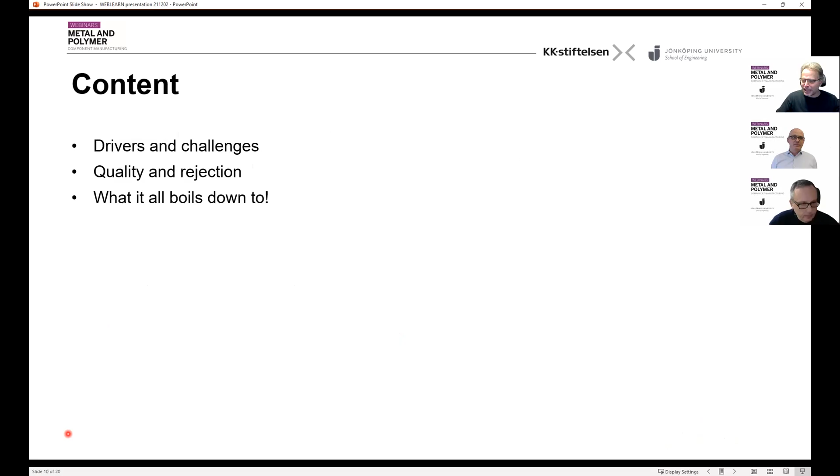My name is Anders Jarfors, and I'm professor at Jönköping University in materials and manufacturing with focus on casting. I will be the warm-up here today, and we'll talk about material quality and sustainability. First, I will cover the drivers and challenges for the aluminum industry, then talk about quality and rejection. And then there is something it all boils down to, which you'll probably figure out before the end. So now, the drivers and challenges.

We have been seeing some fantastic news where things are changing for the aluminum industry. Electrification is driving a lot of change today. We have green electricity, and for the foundry industry that affects resource efficiency in melting and recycling. The aluminum industry has been heavily influenced by the transportation industry, and electrification also drives change in the powertrain redesign with electrical drives. Then we have the telecom industry growing, with huge volumes going to radio filters and heat sinks.

One thing everybody agrees on is that weight reduction is critical, and material change is one way of doing it. Another way is to cast better, with less over-dimensioning, making things thinner and lighter. If you look at the transportation industry, since a lot of electricity is still produced with fossil fuels, it's essential that weight reduction is achieved in vehicles to reach the climate impact targets from the Paris Accord. Especially during the transition, this is important.

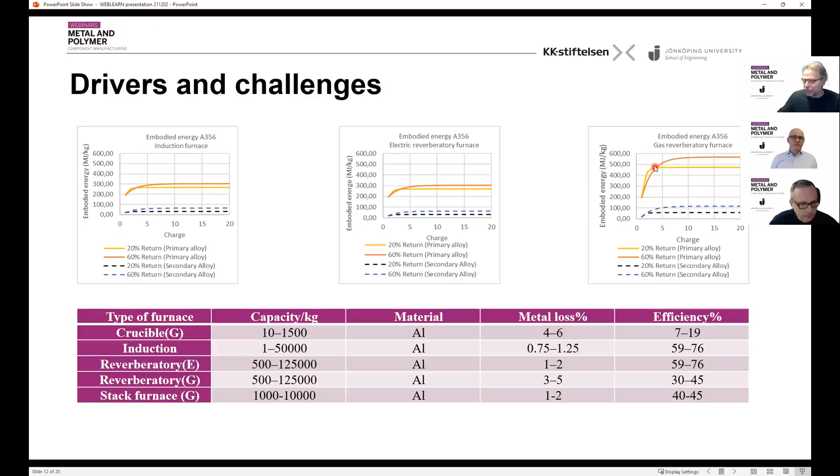Of course, it's better to use recycled material compared to virgin material, but the principle is the same. If you recycle material, depending on how much you recycle and what type of furnace you use, you have different effects. And it's always better with electrical drives than with gas-driven furnaces.

This is something that Murat will cover a little bit more about later. But there is a difficulty in understanding what is a good melt and what is a bad melt. But we know that during the melting process, if you have a lot of material loss, you generate more slag

and there's a higher risk for it to enter the system. Now, these are data that was presented during the S2P conference in Austria, where we talk about semi-solid casting, but that is not the focus here today. The important part is that if you compare the shot weight with the part weight, you have a certain amount that is gating systems, and then you have your rejection rates, and that gives you a certain amount of material that is being returned.

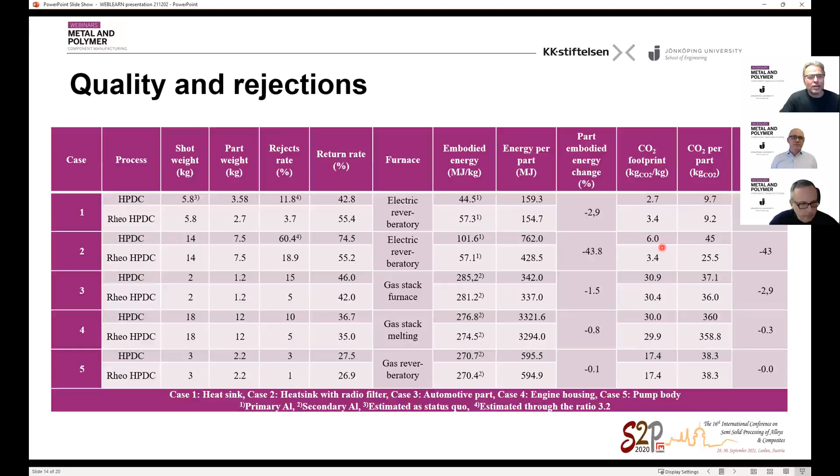But the essence here is still, if you look at the industry, we all know that rejection rates boil down to the last line on your economy. So it goes directly down to rejections, but nobody really cares about the return rate. Of course, it's important not to have a high return rate, but when it comes to the contribution from rejections or gating systems,

the rejections in a foundry are essentially a minority when you have an efficient process. So that means that if you look at the competitiveness of a company, rejects are of course important, but when it comes to the carbon footprint, gating systems are critical. And this is something that has not been properly addressed yet.

And if we think about the gating system, that means you need to have good fluidity in order to be able to reduce those, and that means you need to have control of your melt. And that is essentially what it all boils down to.

To control your melt, that means you need to have high resource efficiency. That means low losses during melting, short melting times, and generating as little as possible material loss and slag that can damage the material further downstream.

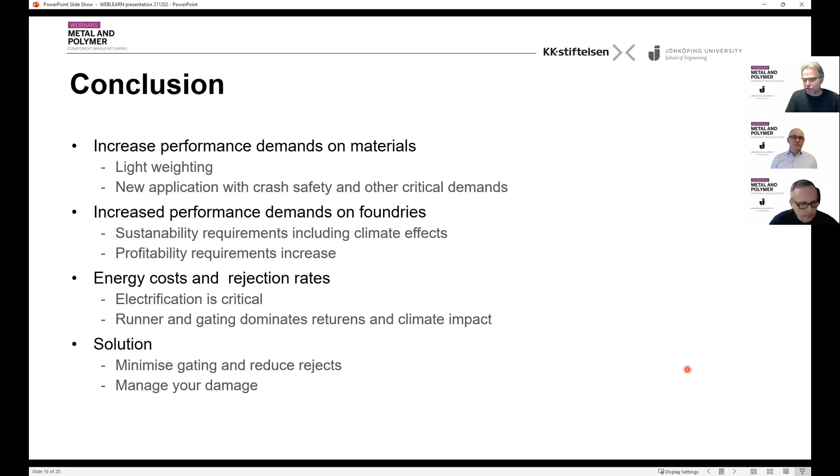Sorry, there is a recording here that comes in. Sorry.

So for some reason this... well, I'm supposed to end here and hand over the presentation to Murat. So it was something that ended with the previous presentation. I'll stop sharing here and hand over to Murat.

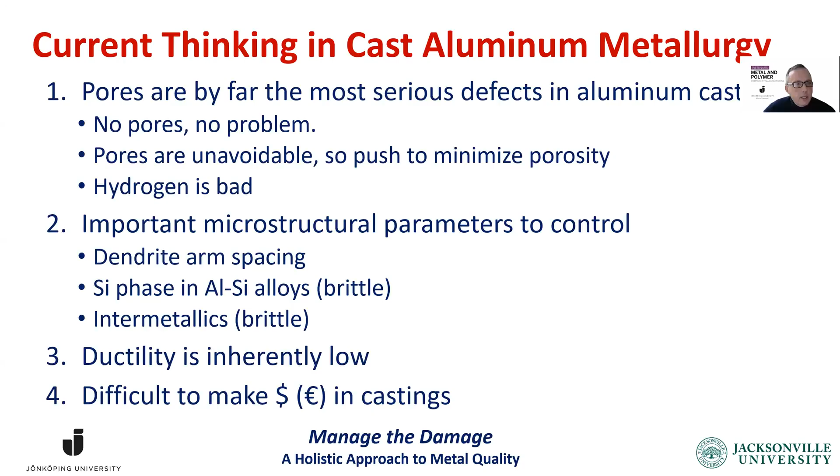There's an alternative thought to this, developed by my good friend and PhD thesis advisor, Professor John Campbell from University of Birmingham, who tells us there are 10 rules to have a good casting. I'm going to cover three of these today, starting with good metal, no surface turbulence, and no entrained bubbles.

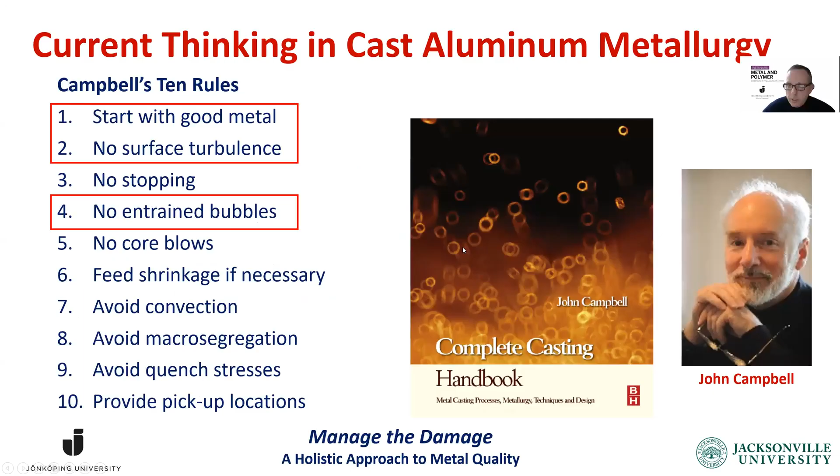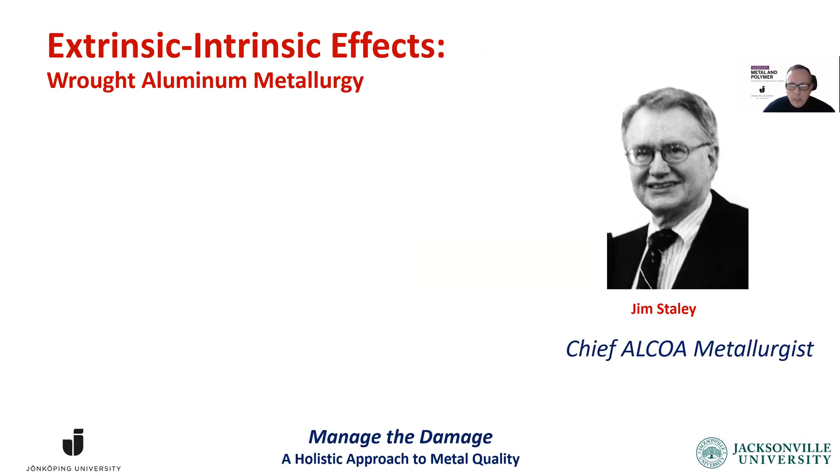I've also had the absolute privilege to work with one of the leaders in this field, Dr. Jim Staley, who was chief metallurgist at Alcoa for a number of years. He taught me that most of the things we see in aluminum are extrinsic—meaning they're not supposed to be there, but they are there because something went wrong. But there is also intrinsic. So what's intrinsic, what's extrinsic? He said hydrogen is extrinsic, pores are extrinsic, inclusions such as oxides are extrinsic. So my thinking was heavily influenced by his expertise and his advice.

All right, what is the damage and where does it come from? It comes from entrainment. And what is entrainment?

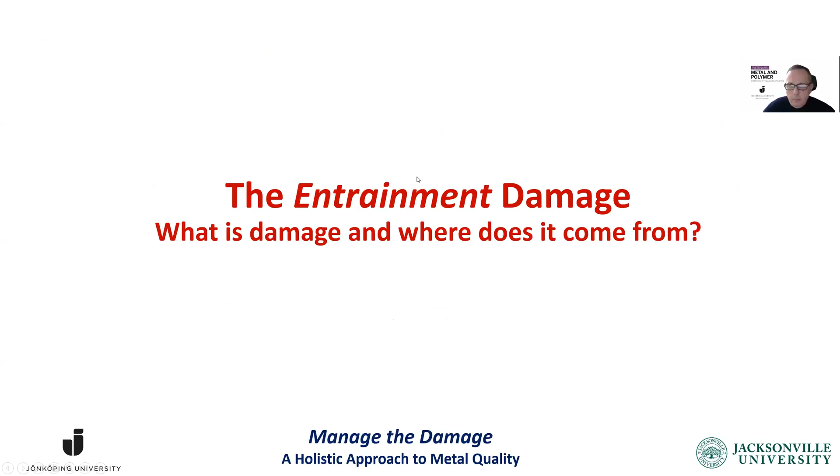Let's look at this wonderful picture from Jacksonville Beach that I took about a month ago during one of my walks on the beach. We look at the beautiful ocean, and what we see is a lot of water, and of course the surface of the water is covered by water. That is the liquid everybody is completely familiar with. Our lives depend on it, and our approach to liquid metal is also deeply influenced by our familiarity with water.

The surface of the liquid aluminum, however, is not covered by liquid aluminum. It's covered by a solid ceramic, and most of the time it's alumina. And when we treat liquid aluminum just like we treat water, that's where the problems start. Because as long as the surface oxide remains on the surface, we don't have any problems. It's a protective layer, it's good, no worries.

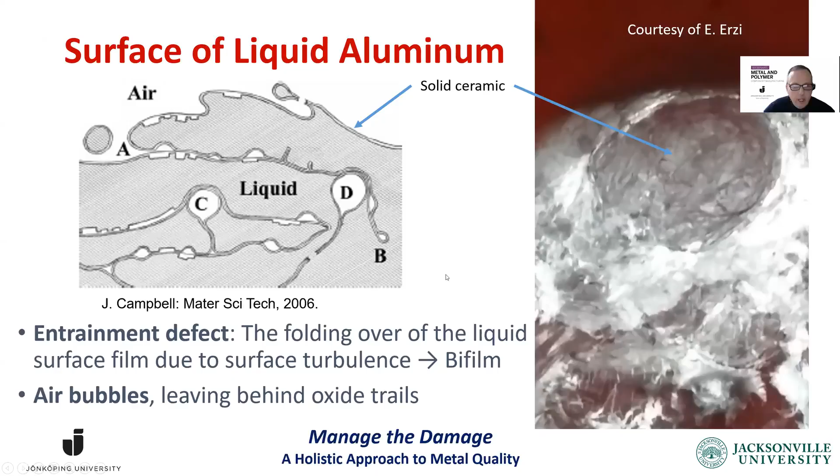But when it gets entrained, because we disrupt the surface of liquid aluminum, that's where the problems start. And then this ceramic gets folded on itself, and those two films form that touch each other, and there is no bonding between them. There's some air entrained as well. So the result is what you see schematically on the left. So we have an entrainment defect, and it's called bifilm because there are two films touching each other.

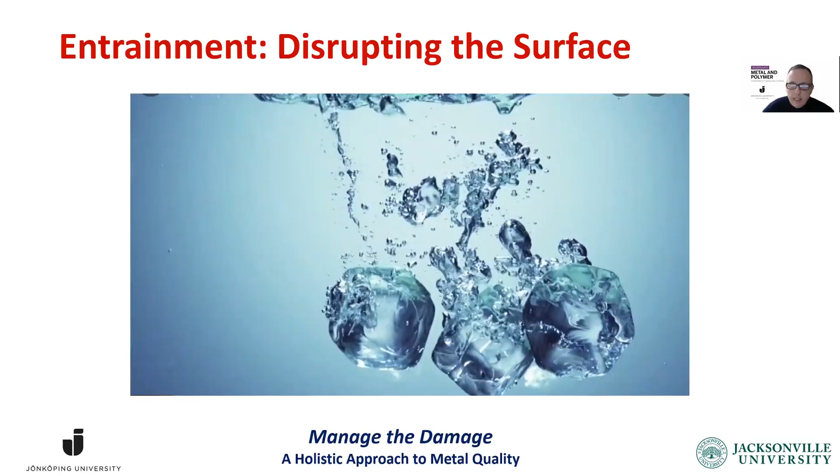And there are air bubbles. Most of the time they leave behind oxide trails because the air inside has oxygen, so it reacts immediately with the aluminum, and then with nitrogen it leaves trails of ceramic. So when we disrupt the surface of water, let's say we throw in ice cubes, it would be similar to putting in reject material or the gating system into the liquid melt. You'll see that it leaves trails of air, and in the case of liquid aluminum, it would be air plus the trail of oxides that goes in. So the disruption of the surface is not a good thing.

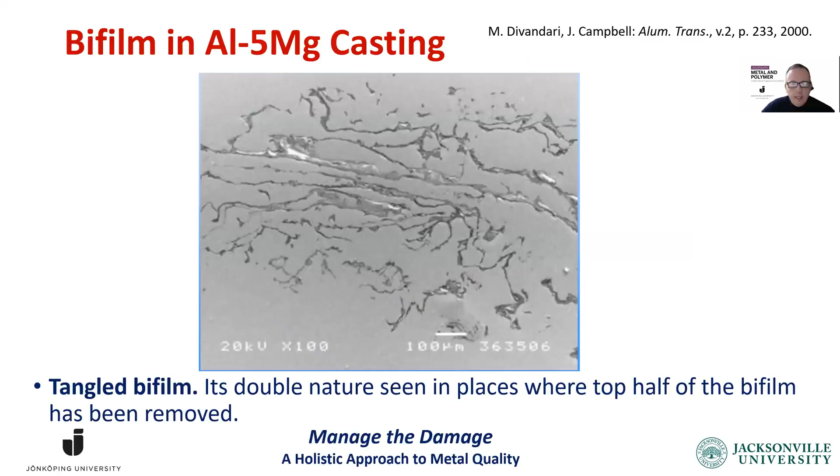In the end, we have these bifilms entrained into the structure. Here we see a highly tangled bifilm. We can even see one of the layers that shine through. But there are many, many examples of this. I'm going to show a few.

And there are young bifilms that are only maybe nanometers thick. They form in a very short period of time, perhaps when the air bubble is rising or when you're pouring the metal, as we usually do. These form instantaneously, and they get entrained into the body of the casting.

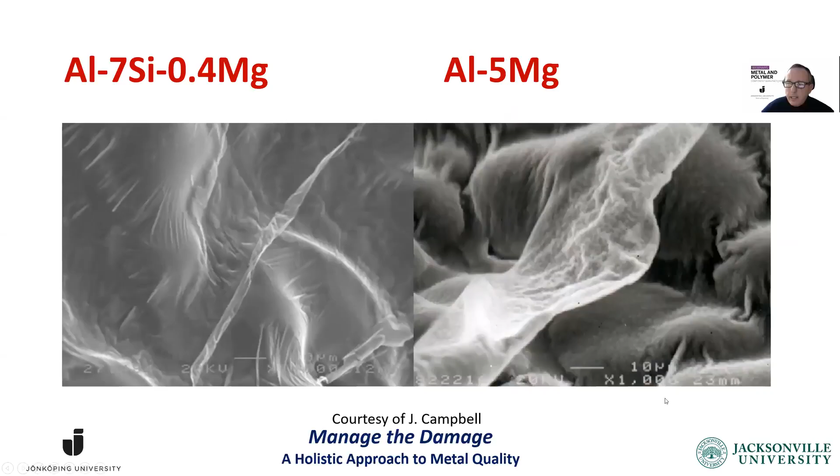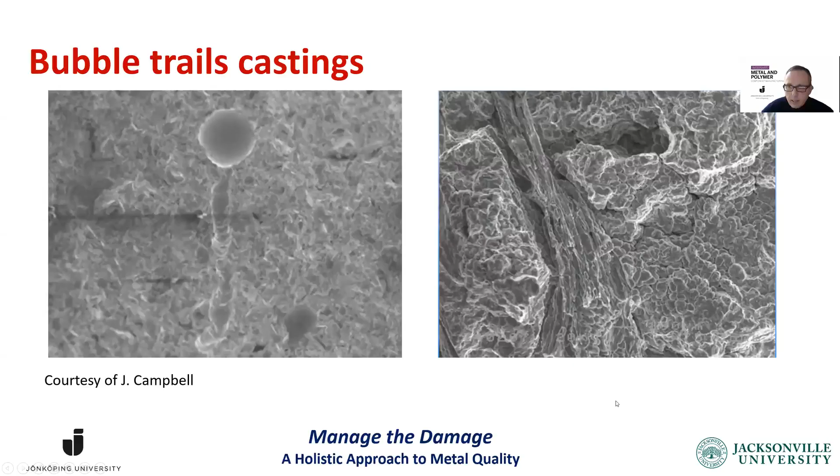And when you come across something like this, it is basically bubble trails, but you look at it from a different angle. You're looking at it from bottom up. So these air bubbles are highly damaging to the liquid aluminum, and later obviously to the casting.

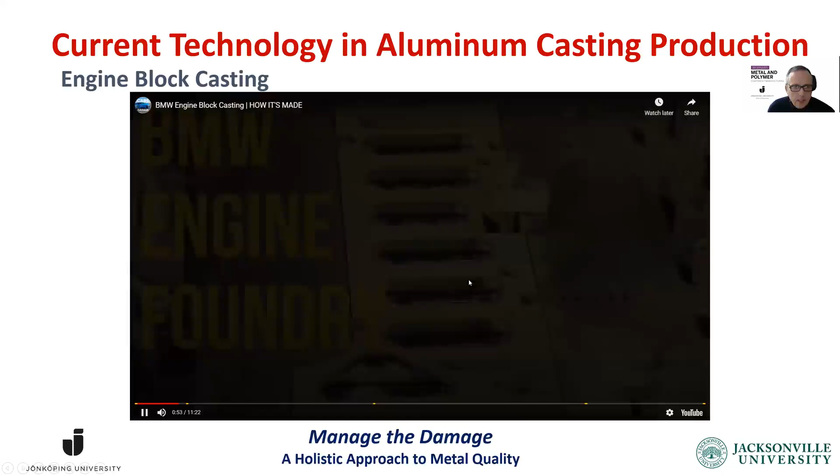So let's take a look at how we produce castings. I found just one video, and I'm going to share that with you so that we're all talking about the same thing, we're on the same page. This is a YouTube video. So I'll jump right to the point where we have the primary

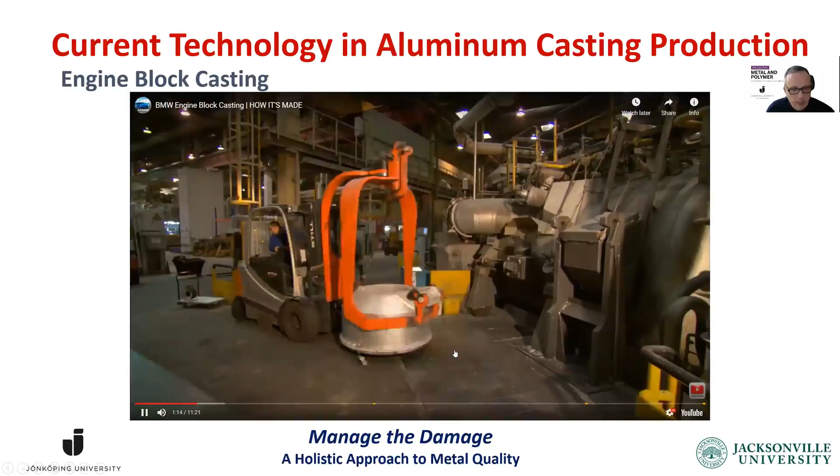furnace where all aluminum is melted. It gets poured into this transfer ladle, and it's transported by the forklift to the machine where there will be the main - and you can see that, please notice the air bubbles, the violent surface phenomena that's going on in the crucible, on the lower crucible.

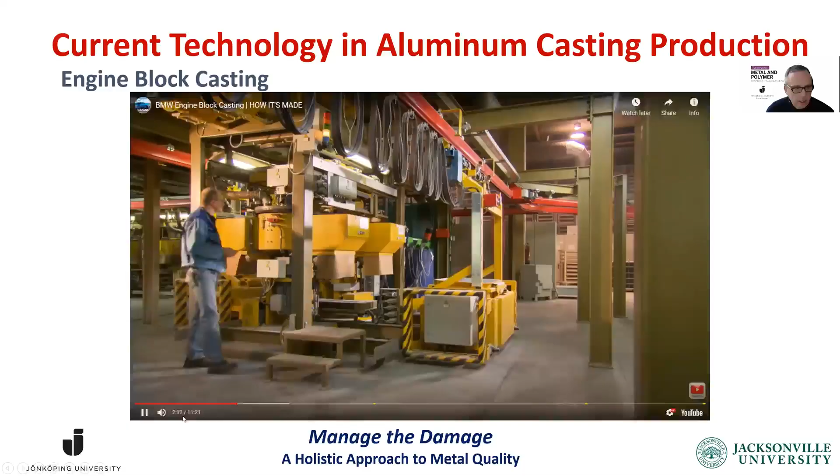So it gets poured from several meters. There's a lot of air that gets entrained, and obviously I don't need to tell you that this is a perfect way to damage the liquid metal. And look at the surface of this - surface gets entrained, air gets entrained, and that's how we do it.

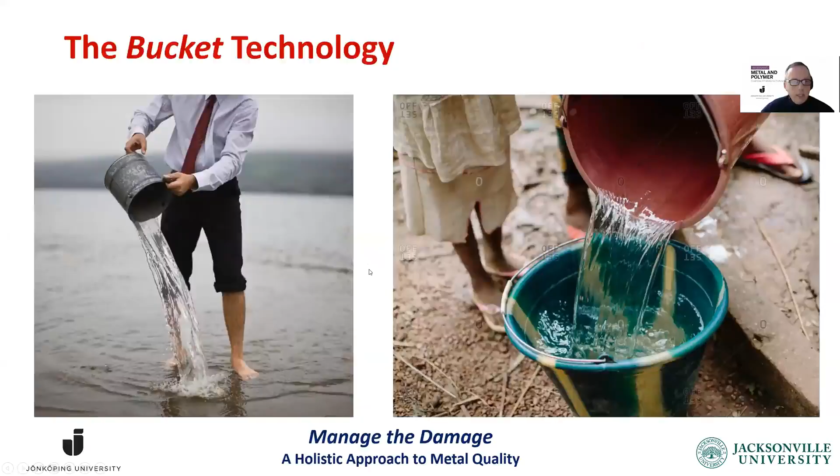So how do we treat our liquid aluminum? With what I call bucket technology, because we're so used to water. We keep on treating liquid aluminum as if it's water, and we don't see anything wrong with that. But there's a lot of things that's wrong with that. And what you have seen is that we don't have only one bucket, we have multiple buckets. So we pour from one bucket to the other. And the damage that happens in the process is significant.

So let's talk about the damage of the melt transfers. In civil engineering literature, it's called plunging jets, and it's known as an excellent way to create a liquid-air mixture. Here you see water on the left-hand side, it's full of air, and as long as it's water, there's no problem with it. But when it's aluminum or any other liquid metal, that creates a huge problem.

I have another video, and it's again from YouTube. On the left-hand side, upper left-hand side, you see the liquid, the water coming in to the surface of water. On the lower left-hand side, you're going to see what goes on beneath the surface. And on the right-hand side, you'll see a magnified version of that.

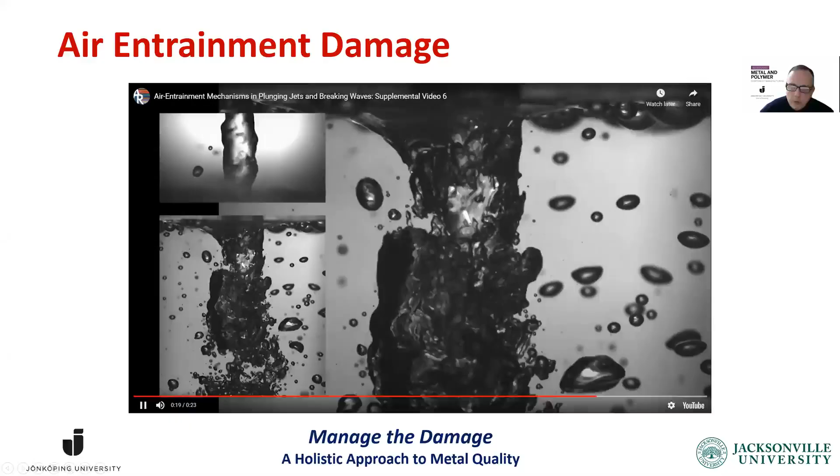So everything you see is air being entrained. You don't see the water coming in, everything you see is air. So when we do these melt transfers, we are entraining, and you can see the bubbles rising on the right-hand side. So when we have these melt transfers, all we do is create a liquid aluminum air mixture.

Here's another research that I came across, again from air liquid aluminum mixture created by pouring from one bucket to the other. At the beginning, we have 65% air, only 35% liquid aluminum. And with time, it goes down to about 18%, but that's still a lot of air, a lot of damage that's created just because we treat liquid aluminum as if it were water.

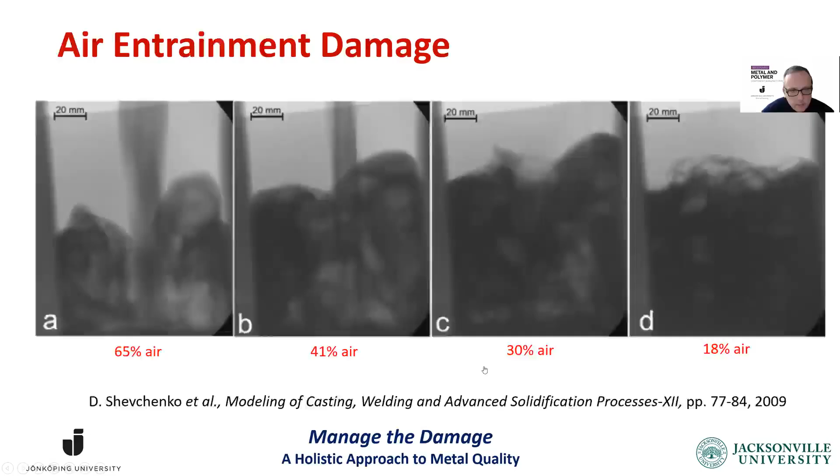And then we have what is supposed to be cleaning. I'll talk a little bit about that later on. But cleaning means, okay, we damaged the metal a little bit, so let's put some flux in there. We know that hydrogen is bad, let's get it out of there. And what do we do? We do rotary degassing.

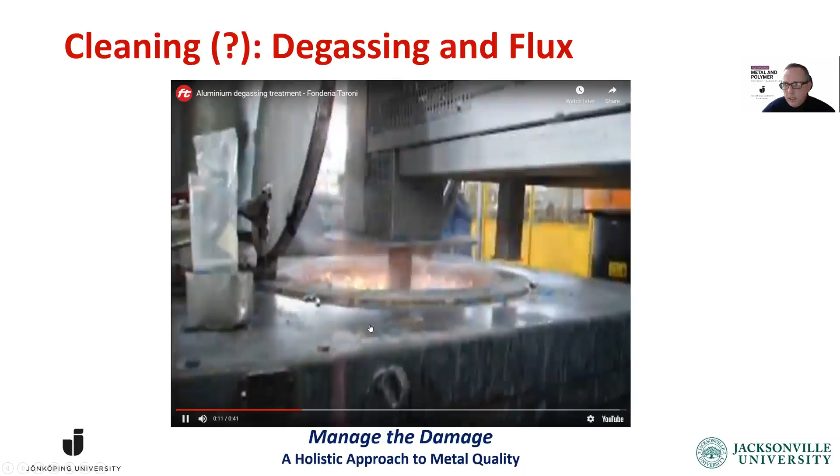So the rotary degassing unit is immersed into the melt, obviously disrupting the surface significantly again. And then you're going to see a huge vortex that happens, and all of the surface gets entrained again. But in the meantime, argon is pumped. Argon is known to take the hydrogen out of there, and we end up with metal with low hydrogen content, and which is supposed to be clean. And we will talk about that later on.

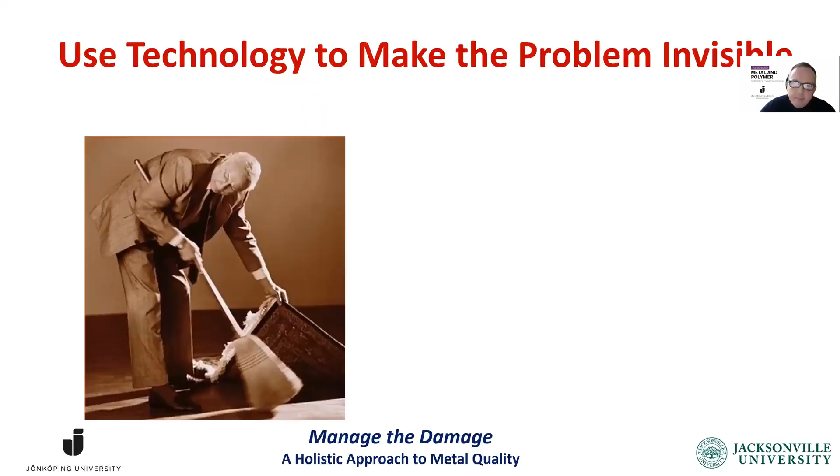So what we do in this process is basically we use the broom technology. And what do we do with the broom? We take the dirt and we put it under the rug so we don't see it. If I don't see the dirt, if I don't see the damage, then it doesn't exist. And I wish life were that simple, because they come back to haunt us.

Then there's damage during mold filling. I have a couple of examples, basically from a sand casting process. One is this classical video from the early 90s from the real-time X-ray at the University of Birmingham. So I'm going to play this video. You're going to see that the mold is going to fill very quickly, but because the gating system is not full, you're going to see some air bubbles that go through, and we're going to watch a slower version.

This is the slow version. There's a huge hydraulic jump. Air is entrained because we have the wrong gating or filling system, and that air, of course, has buoyancy that goes up, leaves all kinds of oxides. Some of that is left behind.

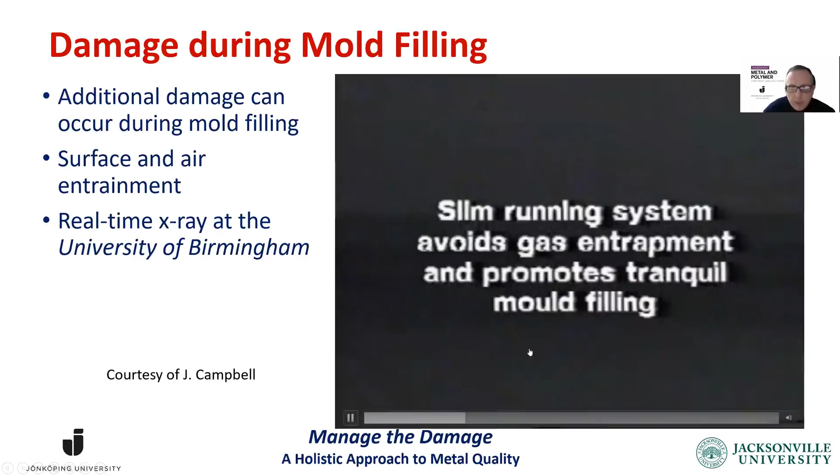But if you were using the right gating system, then air entrainment would not happen. The surface of the liquid would be kept uniform, and there would be no entrainment, no additional damage during mold filling. But if we did all the melt transfers before, this part really doesn't matter. The damage has been done, because damage is cumulative. It starts with the ingots, it starts with the melt preparation, it goes on. Every time we disrupt the surface of the liquid aluminum, damage is introduced and it becomes added.

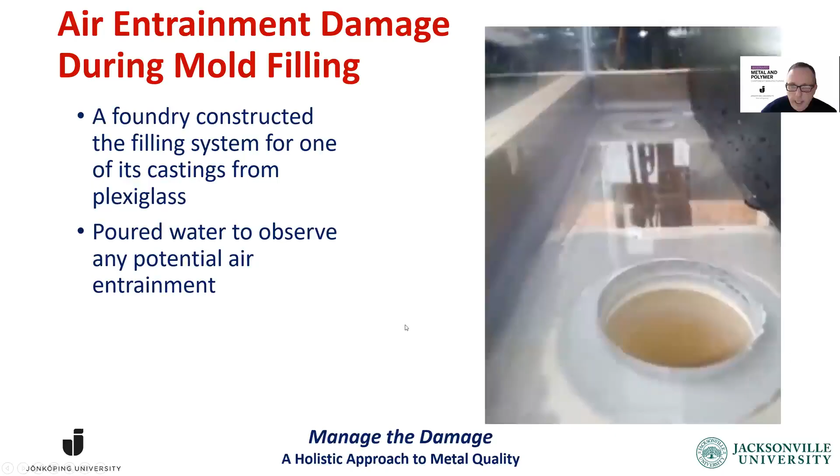All right, so let's go to the next one. Here we have the plexiglass version of the filling system by one of the foundries, and they wanted to observe what happens in the casting and how the gating system is performing by having a water model. And this video is about that, and I'll just play the video. This is supposed to be the mold cavity. The type of the mold cavity doesn't matter. We have the gating system. These are the gates that you see in there, and they have not turned on the water yet. And once they turn on, you'll see what happens.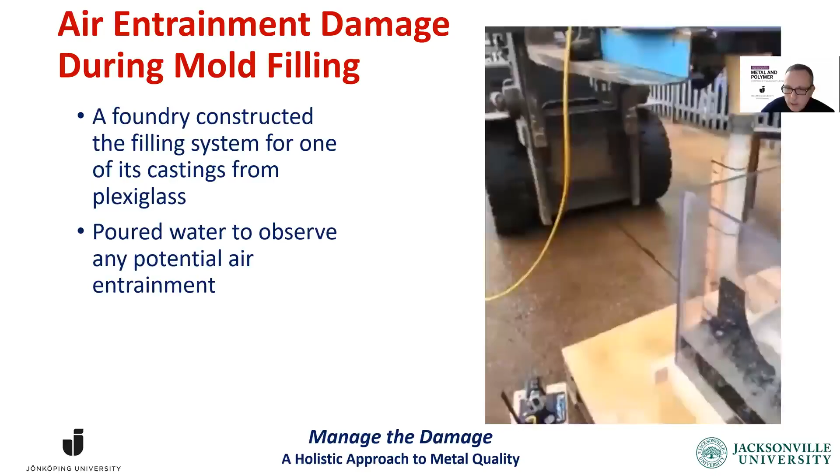You see basically an air water mixture coming in. And you'll see that a lot of air is being entrained in the sprue, and that goes right through. And you have air, air, air. Perfect way to damage the casting. Irreversible.

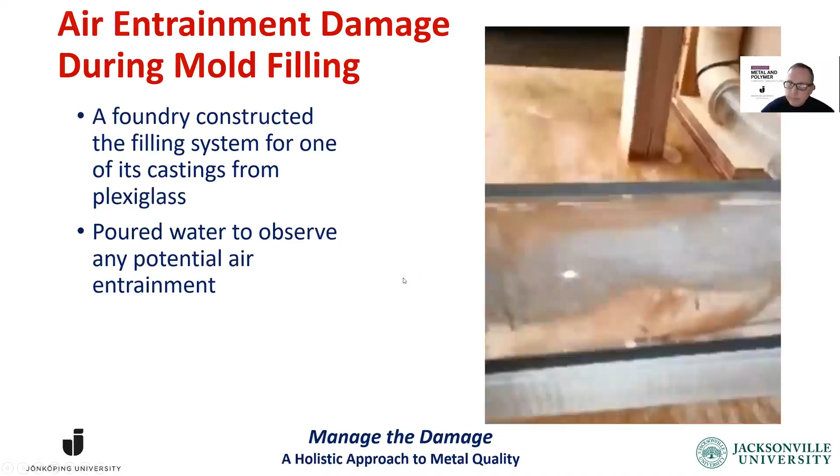Okay, I think you got the idea. So when we come back, I want to pour some, at least my wisdom on what the current thinking is. Everything that we see here, whether pores, microstructural parameters, ductility, or return on investment, how much money we make, that's all due to damage. It's controlled by damage. And if you want to make more money, you have to control your damage. If you want to get more quality out of your production system, you have to understand where damage comes from, and you have to control and manage it.

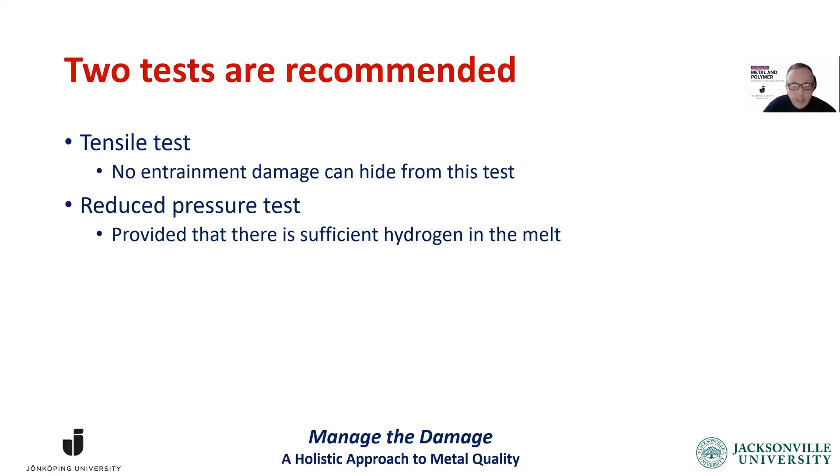So what are the tools and metrics we have available at our disposal? I'm going to recommend two, and they are well known to all foundrymen: the tensile test, because no entrainment damage can hide from this test, no entrainment damage can hide from a tensile stress. Then the reduced pressure test, but with a caveat. The caveat is that we have to have enough hydrogen in the melt so that we can see the damage. Removing the damage or removing the hydrogen hides the damage. And I will talk about that as well.

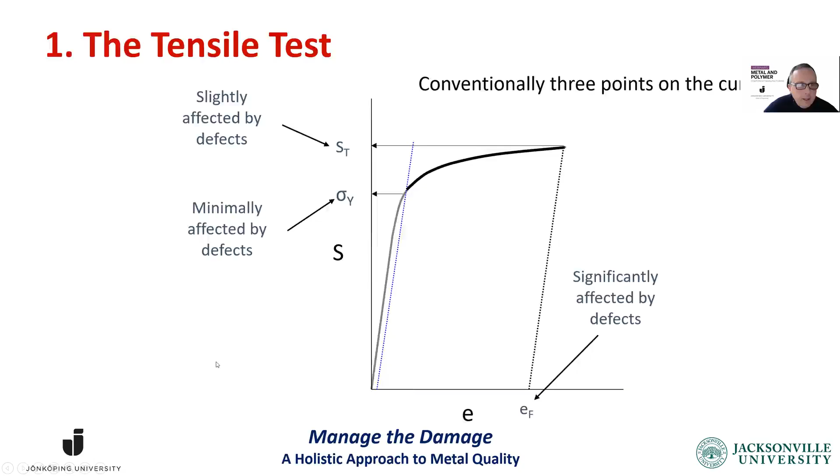So which one are we going to use, and how is this going to look like? Before I give you the answer, let me talk about what we can actually get from the metal. About 10 years ago, I looked at the premium casting and aerospace casting literature. I put in all the data that I could find on several alloys - this is for aluminum, silicon, magnesium alloys. We have about 323 data points here. And what became obvious is that the maximum points form a trend when you plot yield stress on the x-axis and elongation on the y-axis.

So that seems to be the intrinsic ductility strength relationship compromise, as we learned in the textbooks. So we call that the potential, the ductility potential of the alloy. You will see that, for example, at 200 megapascals, we are capable of getting about 24% elongation from the casting. Again, these are actual numbers, not estimates or theoretical values. These are actual numbers. So the best fit to this maximum line, or ductility potential line, for aluminum, silicon, magnesium alloys is 36 minus 0.064 times yield stress. Okay, how can we use that?

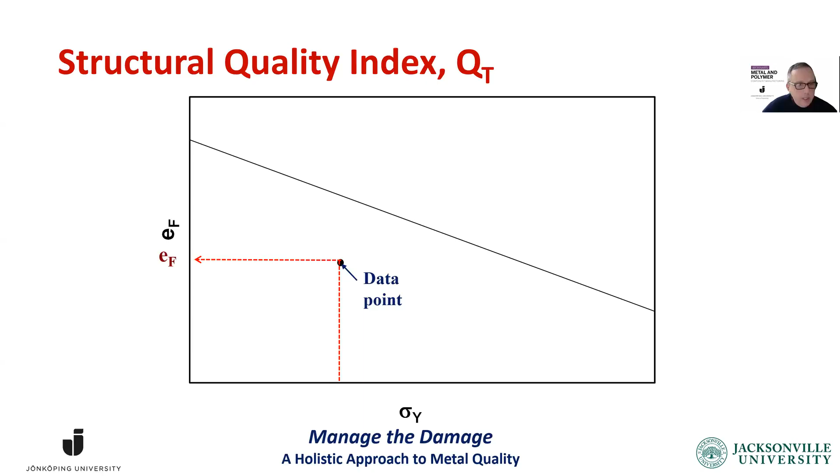I propose that we have a quality index. So when we run a tensile test and have our data points, basically we need the yield stress and the elongation. And then based on the yield stress, we calculate the ductility potential. And basically the quality index is the elongation that we get from the tensile test divided by the ductility potential that would come from that simple equation. So we can get an idea of how much we're getting from the metal.

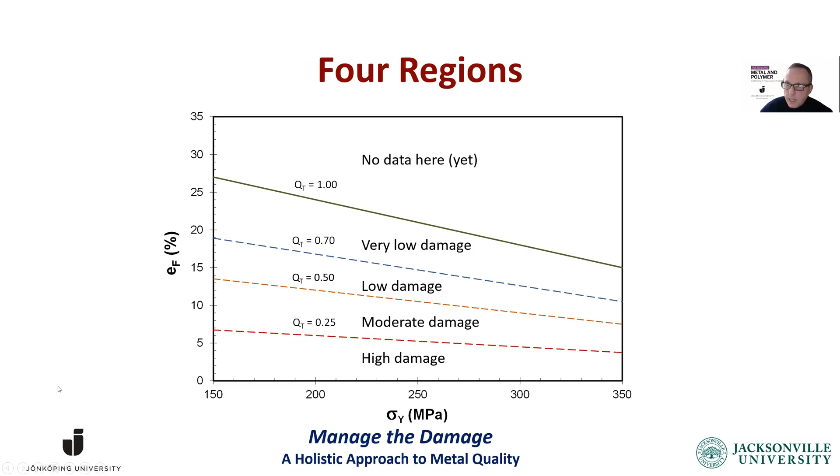So when we look at the yield stress versus elongation area, I divided into 4. Anything below 0.25 is highly damaged. Between 0.25 and 0.5 is moderate damage. Between 0.5 and 0.7, maybe 0.75, is low damage. And above 0.7, around 1, that's very good, very low damage. Now, I have not found any data yet above this 1.0. I expect that as we improve the technology, we can get there and improve. We can get a new equation for the ductility potential equation.

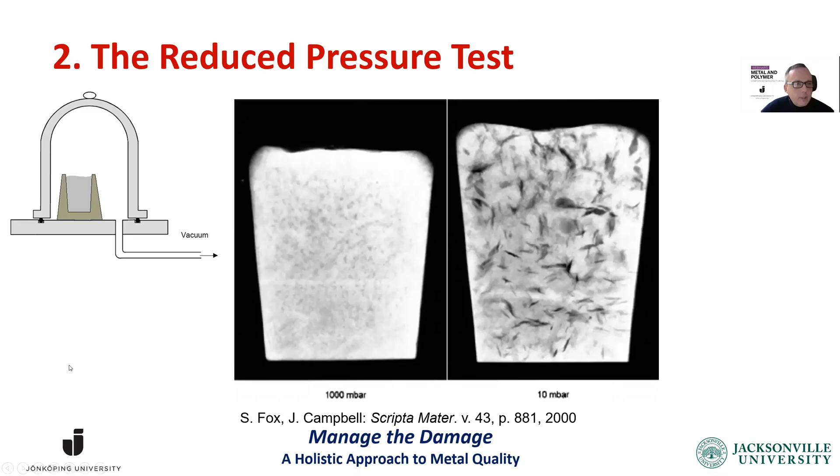Okay, so what are the important concepts about damage? I will come back to these several times. First of all, pores are only the visible parts of overall damage, meaning the real damage is much more extensive. Closing the pores with maybe secondary processes or some other techniques is a very low return on investment. My advice is don't do it.

Money spent in the wrong way. I'm going to give you a couple of examples. First example is squeeze casting, where we apply pressure during the solidification process so that the pores don't open up.

Here's some data I found from the literature. It's an LM24 alloy, about 8% silicon and 3% copper. When we look at the numbers, yield strength is about 120, 126. When it's T6 condition, heat treated, it goes up to 330.

Quite a good response to heat treatment. When we look at the elongation numbers, we see 2%, 2.72%. What's wrong with that? We're used to 1%, so 2% is not bad. Let's put that into perspective. The maximum ductility potential of the alloy at that yield strength is 29%, 28%, and 15% respectively.

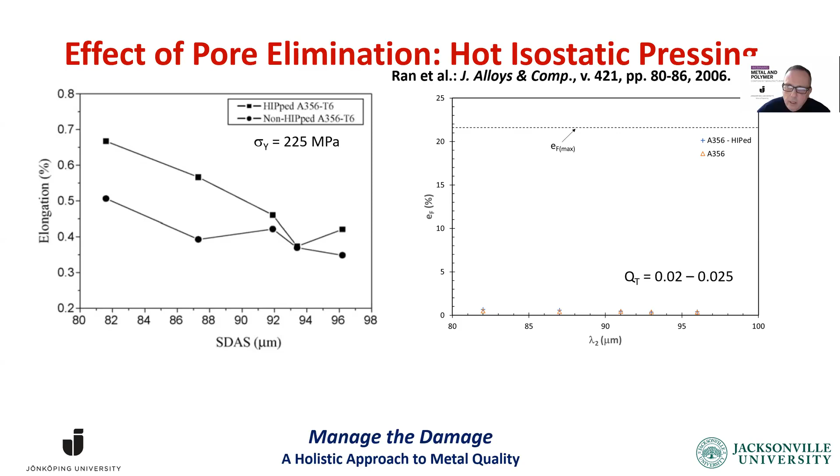we notice that it's really, really zoomed in. And if we zoom out, as I do, on the right-hand side, you're going to see the data points all the way at the bottom, which basically overlap. I give you the ductility potential, which is about 22% at that yield strength of 225 megapascal. And the quality index that we end up with is 2 to 2.5%, 2% of what we can get from the metal.

What does that mean? Applying pressure after solidification closes pores - there are no pores left, just like in the previous one. We don't see the pores anymore, it's gone. But the damage has been done, the damage remains. As a result, we lose 98% of what the metal is capable of giving us. 98% is gone.

All right, I want to give a little bit more insight. Why do I say pores are only the visible part of damage? We conducted this study several years ago. We poured metal from different heights, and obviously the higher the pouring height, the higher the damage. We quantified it - it's all in the paper.

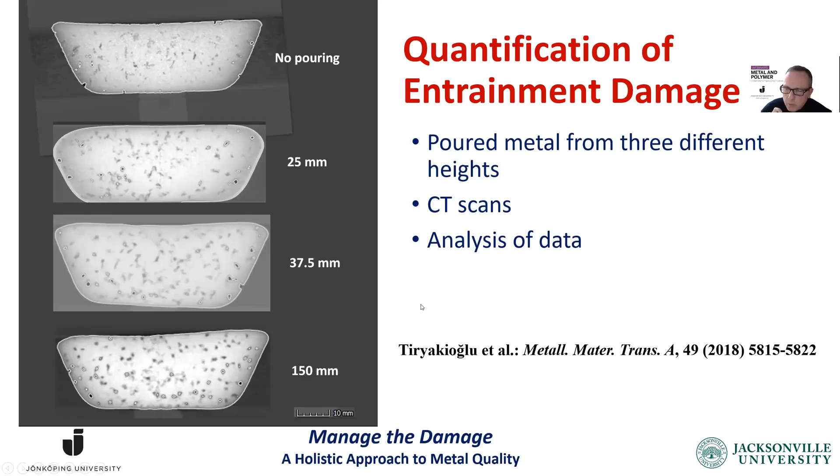I'm not going to spend much time on the paper, but we noticed something when we were looking at the most damaged specimen. This is the RPT specimen. We cut it into half and looked at it. You can see the huge pore expanded to, we thought, maximum limit - it cannot expand anymore. Then we saw this curious feature that you notice with the arrow. What is that curious feature?

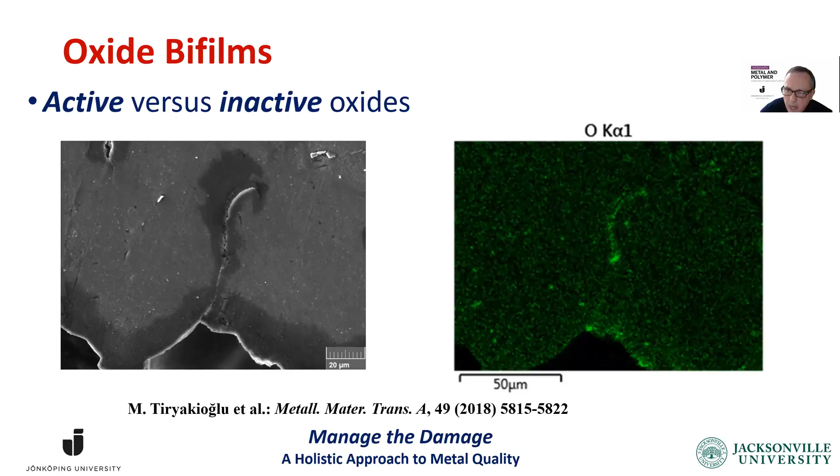We zoomed in, and then we did X-ray mapping, and it's oxygen. So that means there's a folded oxide there - a bifilm that's hiding there, and it couldn't open up. So the huge pore that we saw was only a part of the damage.

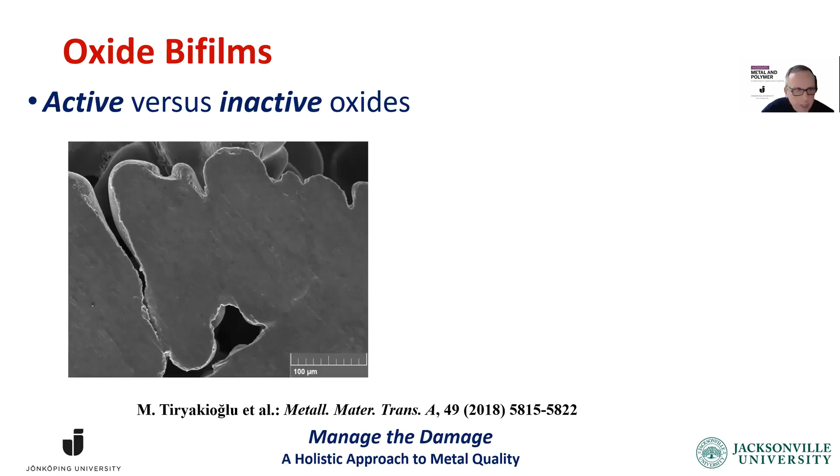And we started looking somewhere else. We looked at this. There doesn't seem to be anything curious about this feature. But turn on the X-ray mapping, and there you see the hiding bifilms shown with the arrows.

More bifilms are hiding because the air in there, that we expanded, we thought, to the maximum, was not sufficient to open up all the bifilms. So the huge pore that we looked at was only a part of the damage. There's more damage in there that just did not open up.

I came across this in fatigue literature, something they call fissure. Here's a pore, and there is what they call fissure. When you read fatigue literature on aluminum castings, they say the cracks start on the first cycle. It's not a fatigue crack, it's the damage, it's the bifilm that's opening up, simply because pores are surrounded by bifilms that have not opened up. The damage is much more extensive.

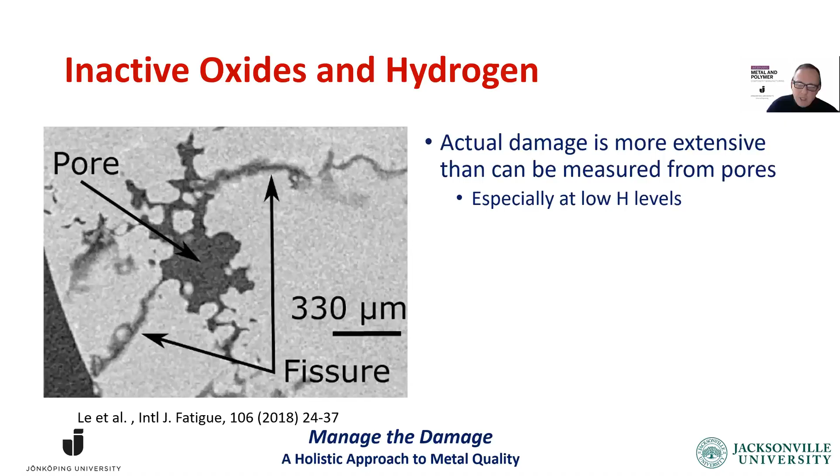So if we were to remove the hydrogen, then we would remove these pores and we would basically hide them. What the damage cannot hide from is a tensile stress. So these inactive oxides open up in tension.

Here's a picture from an in situ tensile test. You see a pore and you see all these cracks around it opening up just at very low stress levels. Why do they open up? Because that's the damage, that's the inactive oxide that did not open due to any kind of feeding problem, any kind of negative pressure that occurs, contraction that occurs during solidification, or gas that goes there.

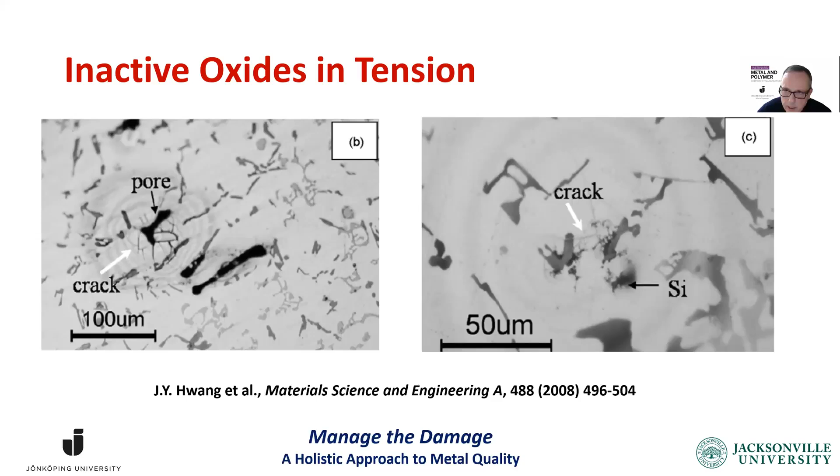And there's one more example, what's known as crack. That's basically more of the same, the hidden damage opening up in a tensile test in a tensile stress state.

So if we come back to the second concept of the damage, we talked about the pores. I'll go against what many of you have learned. Hydrogen is not a contaminant. Hydrogen cannot form pores without entrainment damage. That has been proven. Hydrogen makes the damage visible.

So when we degas, we hide the damage. Basically what we do is sweep the dirt under the rug. And if we approach it from a systematic and strategic point of view, hydrogen can be our friend. And why do I say that?

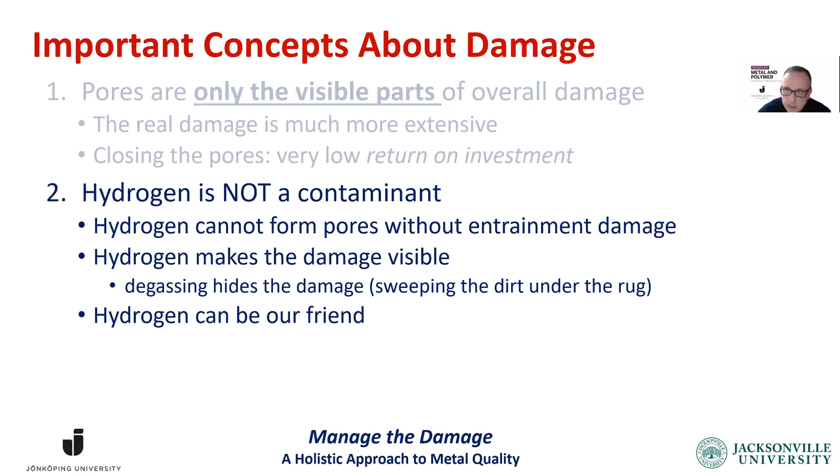First of all, the solubility of hydrogen in liquid aluminum is an order of magnitude lower than in solid iron. So we're not talking about huge levels of hydrogen. Aluminum does not like hydrogen that much. Not much is soluble. But people say it's not really the solubility level, it's the difference between solubilities. This gap, it goes down quite a bit from the liquid state to the solid state. And there's some truth to that.

When we calculate - and we have this weird unit, milliliters per 100 grams of aluminum - I converted that to atomic ppm for your information. So for 1 million aluminum atoms, we're talking about 22 hydrogen atoms in liquid, and 1 in solid. And again, this is for pure aluminum. So when we look at this, what I call the supersaturation, if we immediately go from liquid to solid, that's about 22. So what does that mean? That drop is 22.

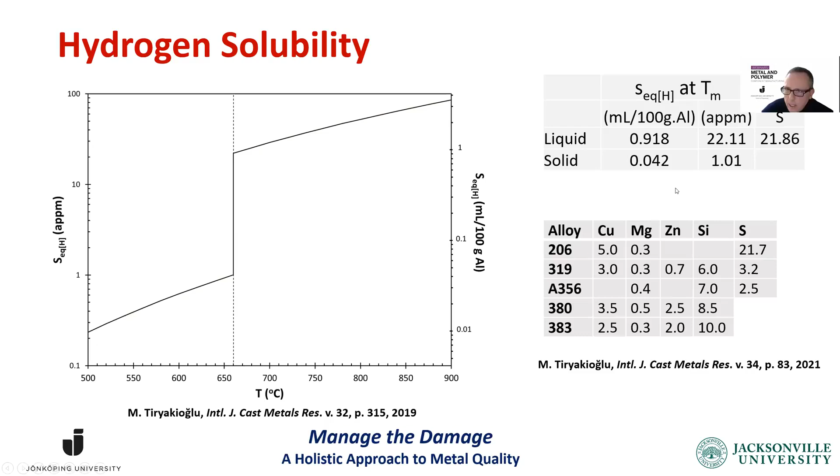When it comes to aluminum silicon alloys like 319, A356, well, we have a much better, or much smaller, problem - about 3 is what we're talking about. So that gap that we've all learned about is not that big. And when it comes to these die casting alloys, I found something that I never thought I would see, unexpected: it's lower than 1. What does that mean? The solid alloy can dissolve more hydrogen than the liquid alloy.

So why do we need to worry about hydrogen in these alloys? We don't. Okay, let's keep on talking.

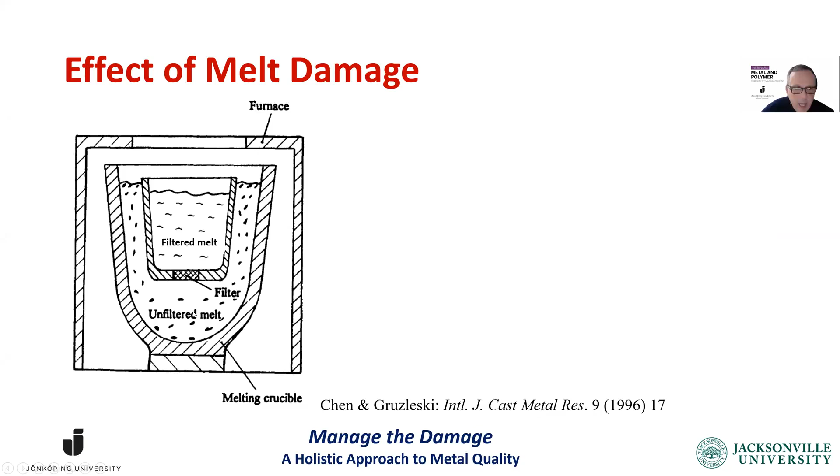There's this wonderful study by Professor Gruzleski from Canada, in which he dipped a crucible with a filter at the bottom, and then they counted the number of inclusions they caught in the filter. That gave an indication of what the damage was in the unfiltered melt. Then they looked at the effect of hydrogen level and the effect of the damage level. So I reinterpreted their results - this is what they could catch in the filter: oxides, inclusions, all the dirt we have in the metal. By the way, these filters are about 50 to 70% efficient, so they did not catch all the damage, but they caught maybe half to 70% of it.

So they had these reduced pressure tests, what they called clean, less clean, and dirty. I say moderately damaged, highly damaged, and extremely damaged, with different hydrogen levels. They are high hydrogen levels, but different hydrogen levels nonetheless. These are the RPT samples. We can see the difference, what the damage makes, and also what hydrogen makes. So the lower the hydrogen, the less the pores, but the more we increase the damage, the pores increase.

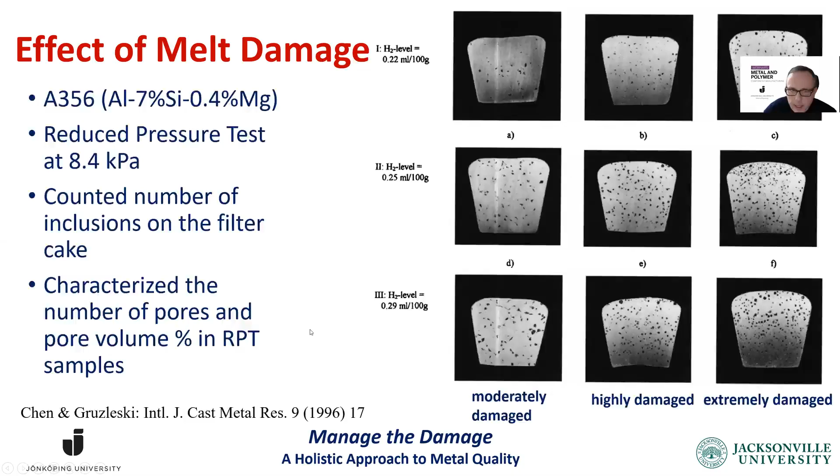So I took their data and took a second look at it. Here on the x-axis, you see the number of inclusions that they caught, which is a measure of the damage given to the metal. On the y-axis, you see the volume percentage of pores that they catch on the RPT specimens. And different curves are for different hydrogen contents.

And when we plot them, basically, the higher the hydrogen, the higher the pore volume. Okay, that makes sense. But the sensitivity to inclusions increases with increased hydrogen content. Makes sense as well. All curves start at 0, 0. So if there's no damage, that means the hydrogen content would not matter. So that's basically what I could learn from this.

And if we were to do degassing and bring the hydrogen really low, what would we expect? We would expect this. Oh, degassed melt, there is not much to see. Okay, let's move on, melt is good. But degassing is a perfect way to hide the real damage.

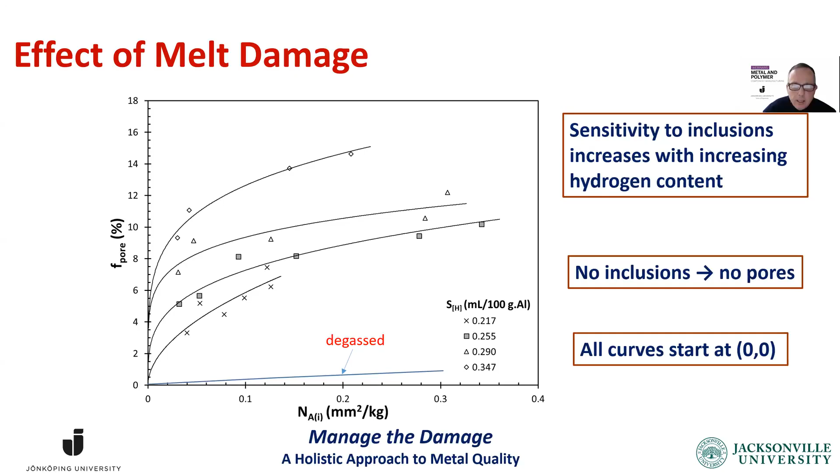And then this is this wonderful study from 1964 from Alcoa. They worked with an aluminum 4.5% copper alloy, 2014. They had two different levels of vacuum. I'm looking at the lowest vacuum, this is very, very low, about 0.6% of 1 atmosphere. And they looked at the effect of filtering, deep bed filtering. Obviously, when you filter, you get much less pore volume, and that makes sense.

But there are a couple points that I want to draw your attention to. First of all, let's look at this point, which is filtered, but it's lying on the x-axis, which means it has 0% porosity. Let's compare it with another point, but just to give you an idea: at this vacuum level, the supersaturation is 147, meaning that the specimen had 147 times the hydrogen solubility, the maximum the solid could dissolve, and still no pores formed.

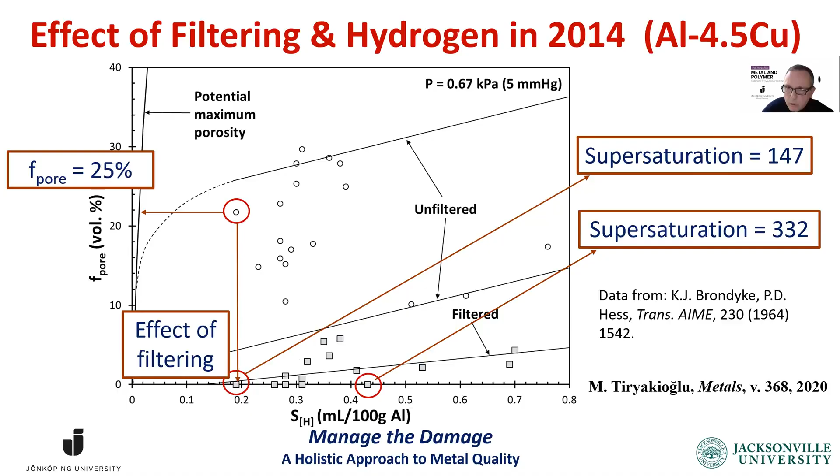Well, that's not all. There is one more point, and it's this one. It's again lying on the x-axis. And when I did the math, the supersaturation is 332. The metal had 332 times the hydrogen it was supposed to hold in equilibrium, and still no pores formed. There cannot be any more convincing evidence than this, that hydrogen by itself is not damaging.

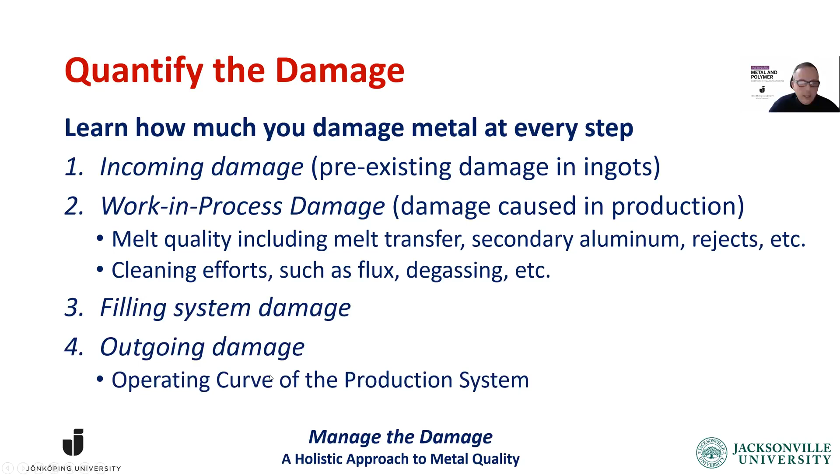So how do we quantify the damage? We have to try to learn how much damage we give to the metal at every step. First of all, what is the incoming damage? How much damage are you paying for when you buy ingots? Then the work-in-process damage that we cause during production. How much damage are we causing in the melt transfer when we add secondary aluminum rejects? And what I call cleaning efforts, I'm not sure that it's cleaning, such as flux, degassing, etc. Filling system damage, and then finally the outgoing damage.

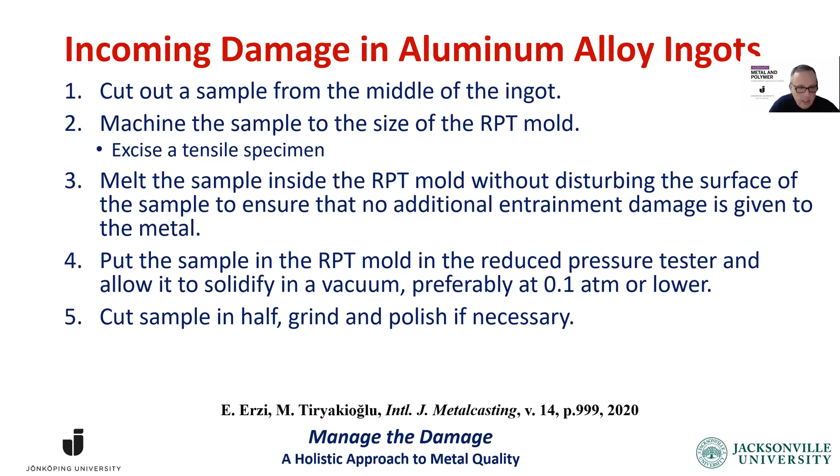So I'm proposing that you have a dashboard of how much damage you have. For the incoming damage, you can cut a sample from the ingot, machine the sample and melt it, put it in the RPT mold and cut it in half, grind and polish, and then the number density of pores will tell you how much damage there is. So we have a case study here: we have the direct chill ingot and gravity die.

Not all ingots are the same. We have much more damage from the gravity die.

These are some of the metrics you can use: total pore area, pore volume fraction, bifilm index developed by my good friend Derya Dispinar, who I think is in the audience today.

Or you can do a tensile test. You can excise a tensile specimen. Here from the same ingots, we have 1% from the gravity die, and we have about 24 or 10.9% from the direct chill casting. When we look at the quality index, one has 0.04, the other one has 0.4, which means it's 10 times better.

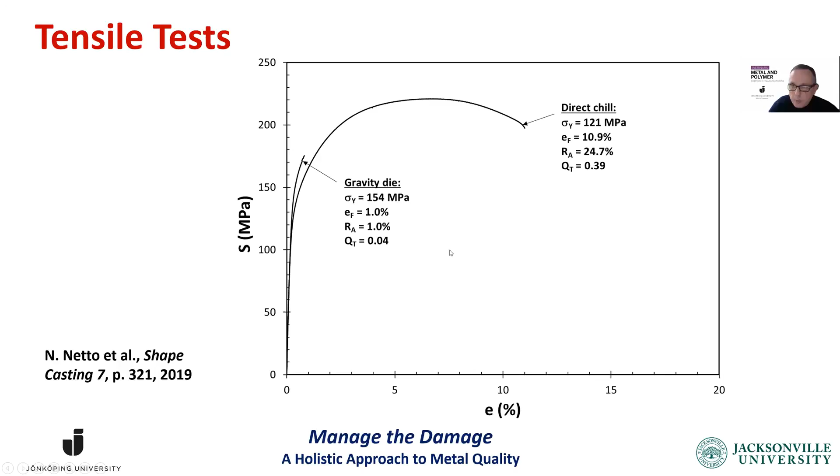Then how much damage do we have in the work in process? Important concept, again, rotary degassing actually damages the melt. Flux makes the melt mediocre. We learned from Dispinar and his co-workers that fluxes are about 50% efficient. When you have a bad melt, it makes it mediocre. When you have a good melt, it damages it to mediocre level.

So at every stage in the process sequence, so you have the big furnace, take a sample, take an RPT sample, take a tensile sample. After the melt transfer, take a sample, RPT sample, tensile sample. Second melt transfer, again, before, after, and all of these. You don't need to do it all the time, but you need to do it every now and then. And it's not very expensive. It does not interrupt the production, but you need to get data. You need to understand how much damage you're giving to the metal.

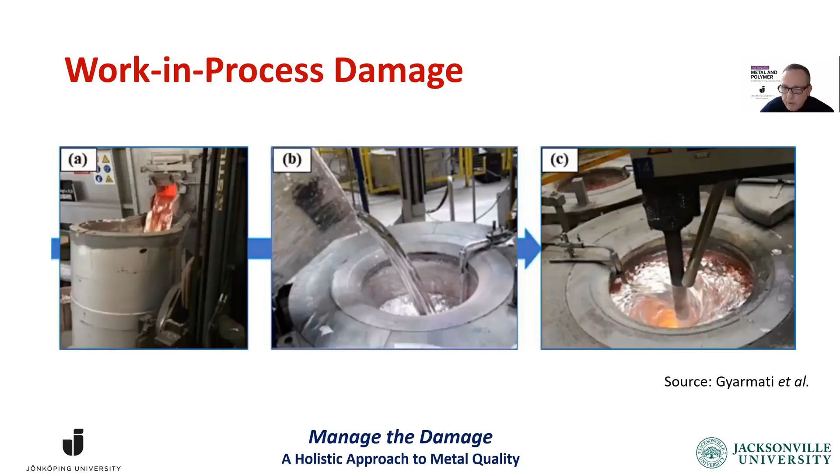How do we quantify the gating system damage? We had a case study, a casting here. We had 3 tries with it. It's a real casting. We tested the effect of the pouring basin, and then whether the vortex worked or not. In the 2 first ones, we used the flux. In the third one, we did not. We've used a direct chill ingot. You'll see that the gating system is very slim, designed based on the concepts developed by Professor Campbell.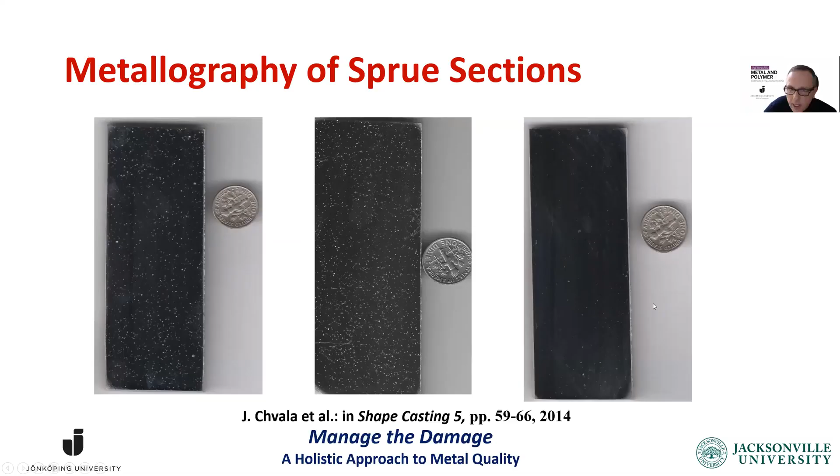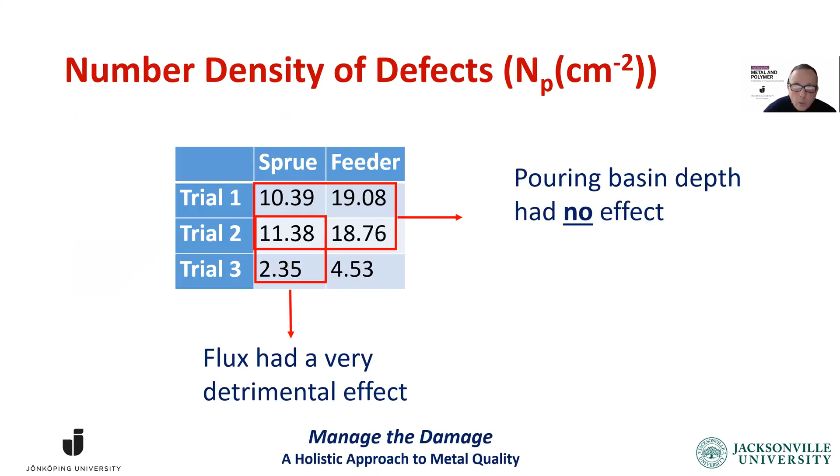These are the risers, feeders that we have sliced in the middle. We take a look, but it's the same story. So we could look at the sprue feeder. When we look at this, the pouring basin depth had no effect. That gave us good information. When we look at this, flux had a very detrimental effect on the quality of the casting. And overall, you can see the beneficial effect of the vortex gate.

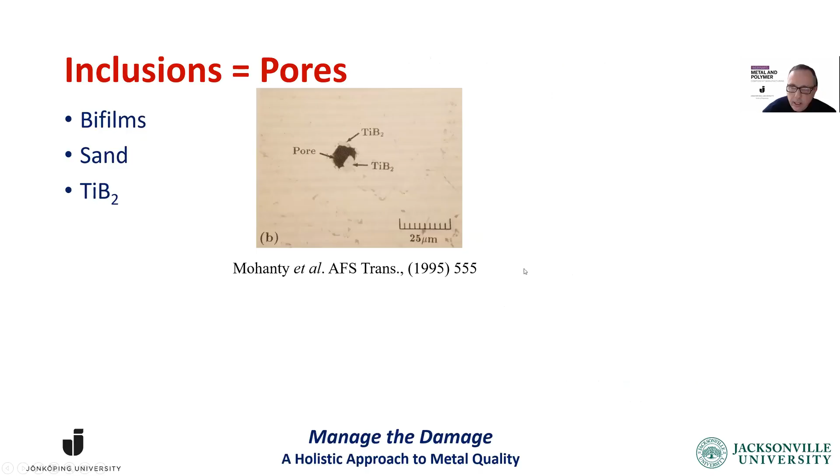So there's a lot that you can gain by looking at what you already have. When we produce inclusions, we produce bifilms like sand, or even when we add grain refiner. All that grain refiner does is distribute porosity. Here's an RPT of a grain refiner, courtesy of Derya Dışpınar, and what it does is just create pore. So grain refiners' real purpose is porosity management. There's no need to add grain refiner modifier when the melt is clean. That's what they practice in aerospace castings. You don't need it. Just do not disturb the surface of the liquid metal.

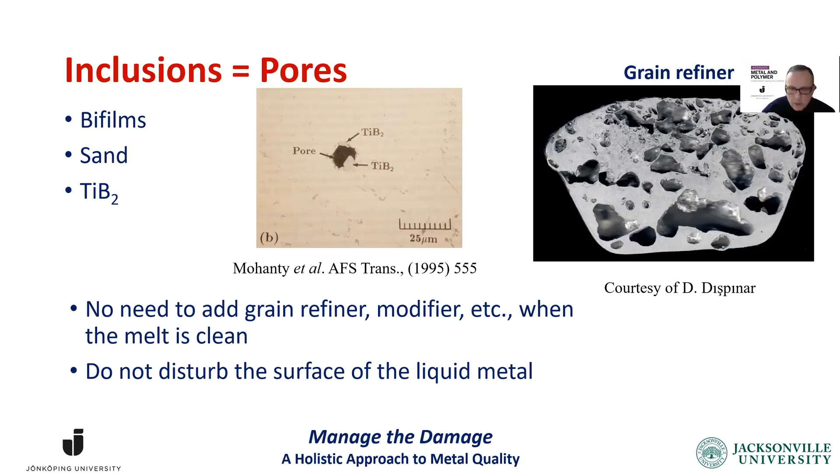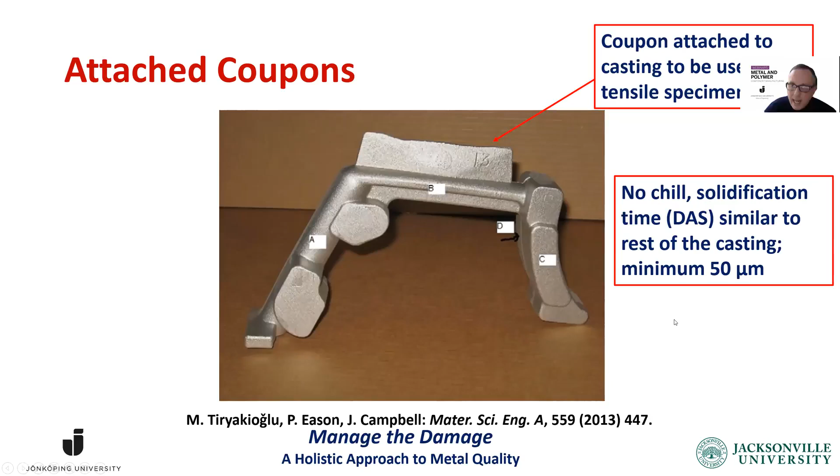So I'm coming toward the end. How do we quantify the overall damage? Just attach, have a little extra area in your casting. It's common practice in aerospace. There's a coupon attached to the casting. You cut it off and you excise a specimen and you run a tensile test. You don't need to chill it. It needs to solidify under the same conditions. It gives excellent information about the quality, the outgoing quality of your production system.

So that perhaps in the end, when we collect all this data, we can develop what I call an operating system, the operating curve of the production system. And what do I mean by that? I'm going to give you 3 examples. One was reported by Professor Campbell. He reported these results came from a foundry where they looked at the results. No matter what they did, the quality index fluctuated between about 5% to 30%. And there was a lot of scatter, but even the best efforts produced about 0.25.

And so they were operating on a curve, so they went from one side of the curve to the other. In the end, the foundry decided to revise their production system.

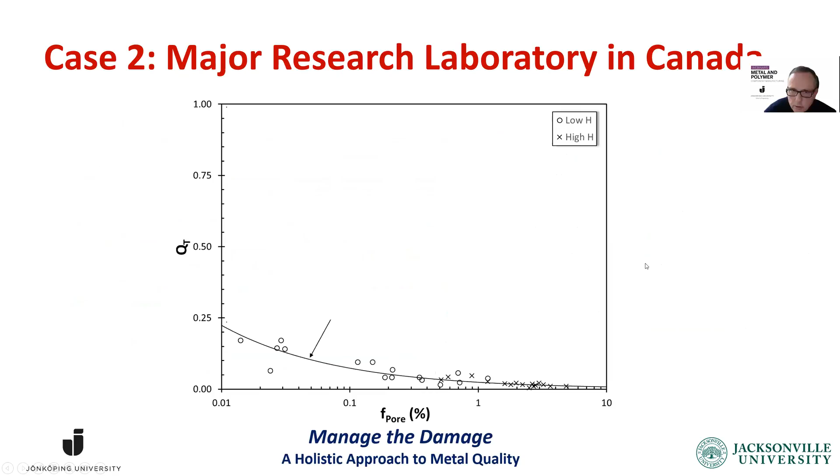Second case comes from a research laboratory in Canada, this 319 alloy. I took their data, plotted them - low hydrogen, high hydrogen, doesn't matter, it falls on the same curve. Here I plotted the pore volume percent versus quality index. What I did here is I zoomed in. Let's zoom out. When I zoom out, what do we see? This is the operating curve of the production system.

So when we degas, all we do is we move on this curve. We go from left to right or right to left. But the main message is that even when we do our best, meaning the y-intercept, there's the inherent damage in castings due to production system. And in this case, we're losing about 77% of the potential of aluminum based on the entrainment damage.

Okay, this comes from a real aluminum casting production facility. We published this several years ago. I think my co-worker Ghasem is also in the audience.

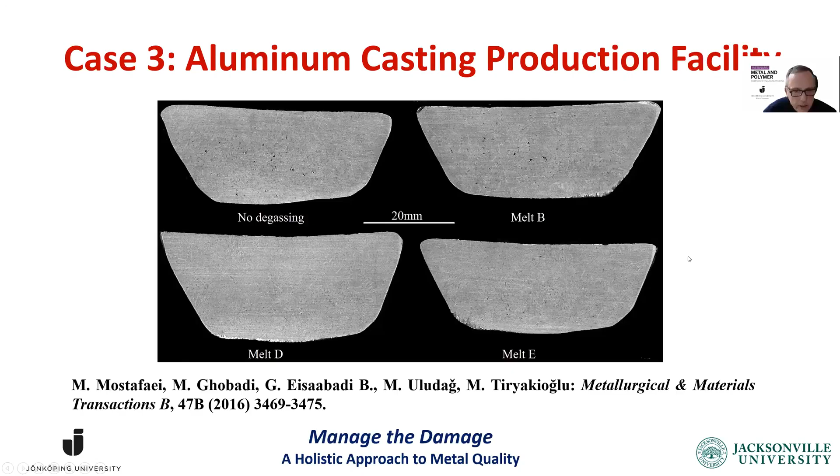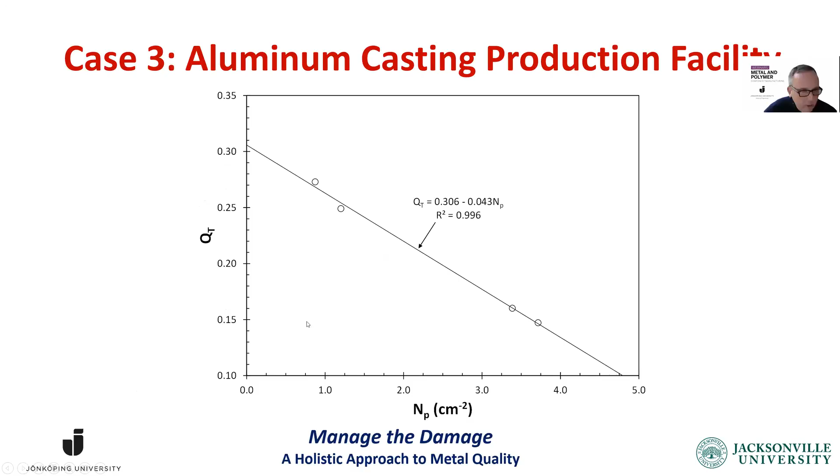And we reported, okay, how can we optimize the degassing procedure? Sometimes degassing can damage, and we can actually see it. Some of the times we can't because hydrogen is gone. But when we plot the data along with tensile tests, this is what we saw - the number of pores on these RPT specimens versus the tensile tests. When we zoom out, this is the operating curve of the system. And again, it's the same story: we lose about 70% due to the inherent damage in the production system.

So I want to end my presentation with some words of wisdom from one of the most recognized quality experts, Dr. W. Edwards Deming. He said, defects are not free - somebody makes them and gets paid for making them. I revised it slightly: damage is not free, somebody makes it and gets paid for introducing it into our castings.

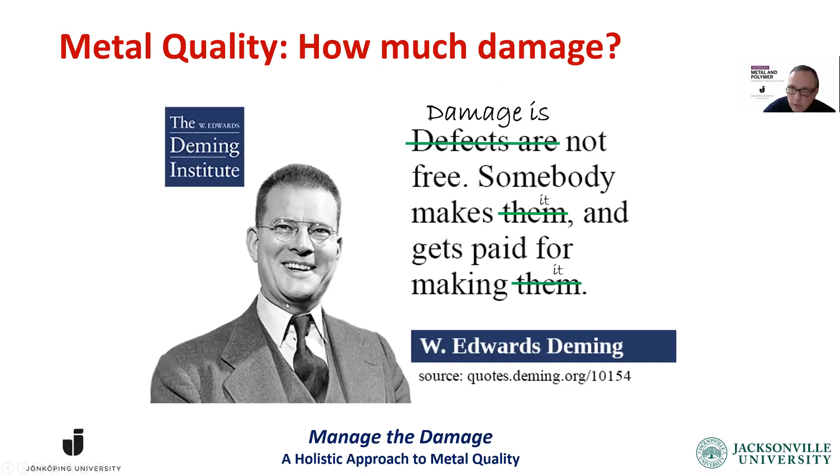So in conclusion, most, if not all, of our issues that we deal with can be attributed to the damage given to the liquid metal just because we treat it like water. We have to start seeing the damage, where it comes from, and then when you start seeing it, you cannot unsee it. Then you cringe when you see it. Then we can start quantifying the damage - incoming, work in process, filling system, outgoing damage - the damage given to the liquid metal that the customer is not paying for.

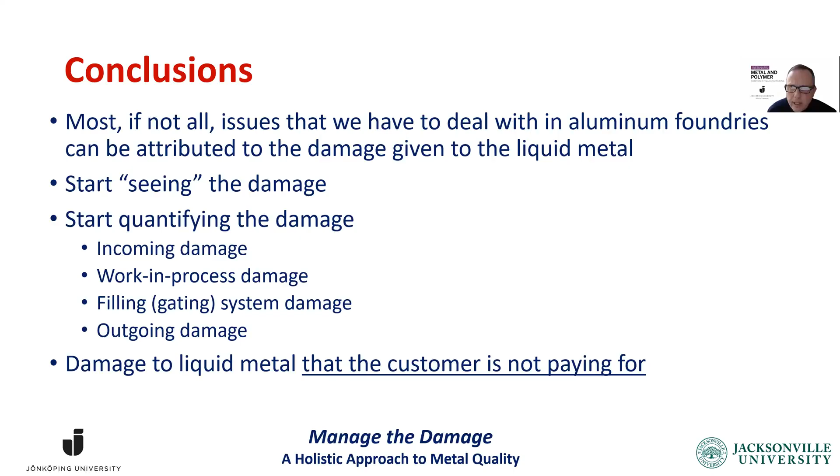The customer wants good product from us, but maybe they don't get it. And so if there are users of castings in the audience, why is it okay to get losses from the casting that you purchase?

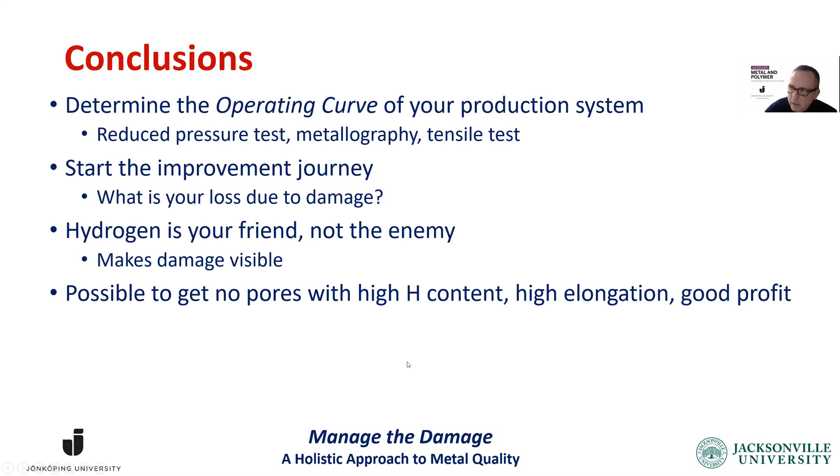Let's determine the operating curve for your production system: reduced pressure test, metallography, and definitely a tensile test. No damage can hide from a tensile test. Then start the improvement journey - what is your entire loss due to damage? Hydrogen is your friend, not the enemy. It makes the damage visible. Stop sweeping the dirt under the rug. And it's possible to get no pores with high hydrogen content, high elongation, and make good profits.

And thank you for attending.

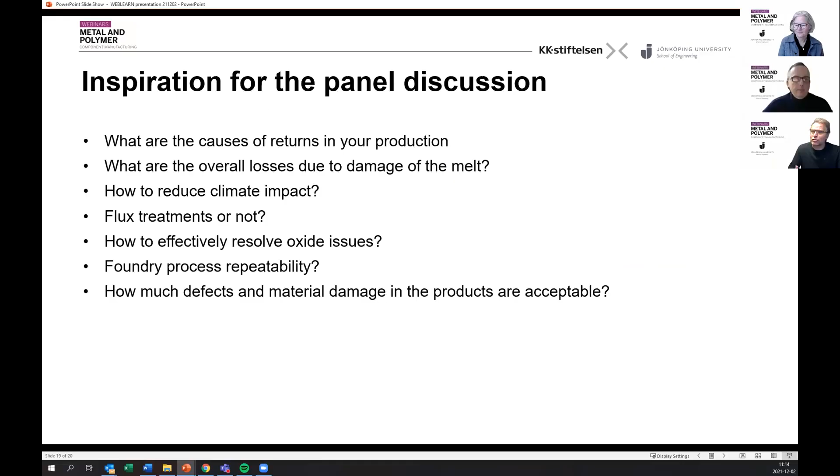Okay, so then Murat, we have some thoughts that we would like to discuss, and we also would like to share some questions with the audience as well. So first of all, what are the causes of returns in your production? Thinking about that, when you have your system, why do you get return material? That's your first question. Is it because of damage? Is it because of gating systems?